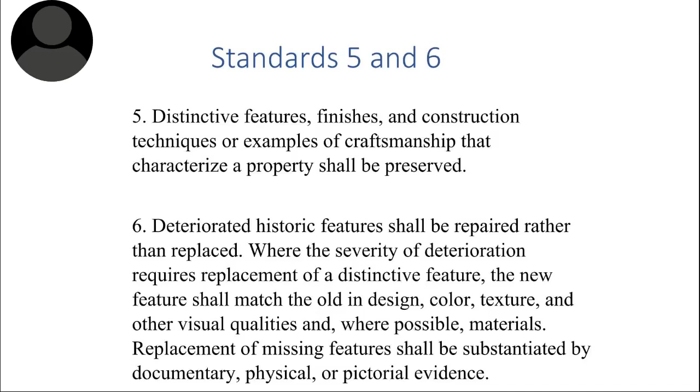Standard 5 and Standard 6 both talk about character-defining features that must be preserved and repaired rather than replaced. Windows are character-defining features on almost all historic buildings, and every effort should be made to keep them.

There are several reasons an owner might give for wanting to replace their windows. The most common are thermal performance, lead paint, ease of operation, and minimizing maintenance.

Hi, Roberta. I just wanted to interrupt for a sec to say that you need to get your camera on so people can see you. Oh, my camera. There it is. Okay. Perfect. Thank you.

Thermal performance can be achieved by keeping the original sash and by adding weather stripping, filling air pockets with insulation, and adding a storm window. A triple track storm window will protect the sash from the elements, therefore cutting down on maintenance.

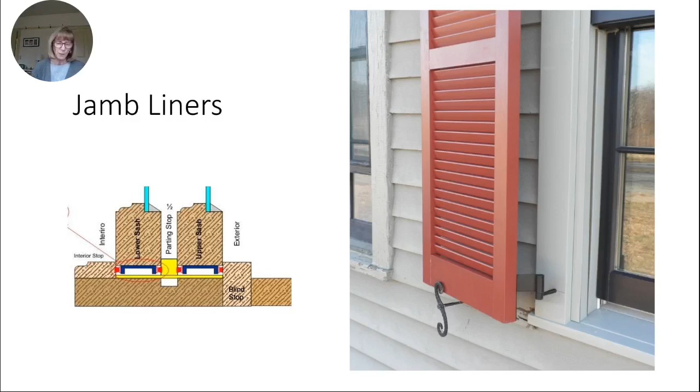So what do you consider when you're looking for replacement windows? First, you want to preserve as much of the historic material as possible, including casings, jambs, sills, plaster, and clapboard that surround the windows. Secondly, you want to preserve the historic design and appearance, so the new window should look exactly like the window you're replacing.

So let's talk about products available in the replacement window market and the pros and cons of each. When conditions warrant the replacement of a historic window, there are two ways to replace windows: you can replace the sash and frame.

This may not be the best option. Installing new frames in existing openings tends to reduce the size of the sash, making a replacement in kind difficult.

These are two ways to install a replacement sash and frame. The first one, you would remove the entire frame that's there. When you do that, you also have to remove the sills and casing, and install new frames in place of those. The removed frames, casings, and sills, which are original historic fabric, are lost unnecessarily.

In most cases they have not suffered the same deterioration as the sash. By retaining the original frames, casings, and sills, the material waste that would end up in dumpsters and landfills is reduced, and the risk of damaging other surrounding historic fabric like plaster, clapboards, and decorative moldings is reduced.

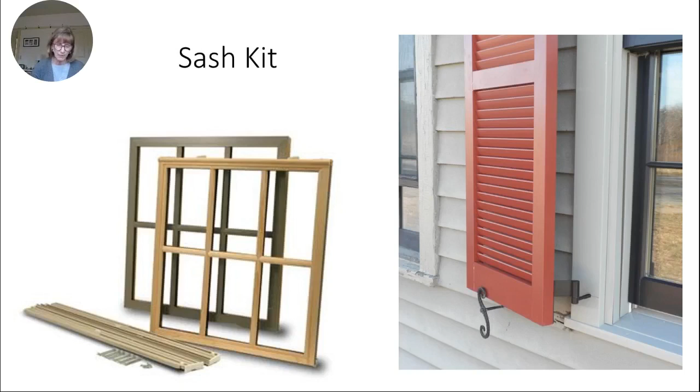There is another kind of jamb liner, called a tilt-pac sash kit. As the name suggests, this type of jamb liner allows the sash to tilt in for easy cleaning. In order to do this, the jamb liner sticks into the opening and is visible when the window is closed, as you can see here in this illustration.

Not only will you see the jamb liner, but the sash must be made smaller to allow for the added depth of the jamb liner. This loss generally comes out of the pane size, which again makes it impossible for it to be a replacement in kind. To meet the standards and preserve historic fabric, and to have a window that looks most like a historic window, a sash kit with a concealed jamb liner is the best option.

So you can get sash replacement in a single glazed, double glazed, or thermopane, or even a triple glazed window.

These come in a true divided light, which you can see here in this picture. A true divided light window has separate panes of glass separated from each other by muntins. The historic windows are an example of a true divided light.

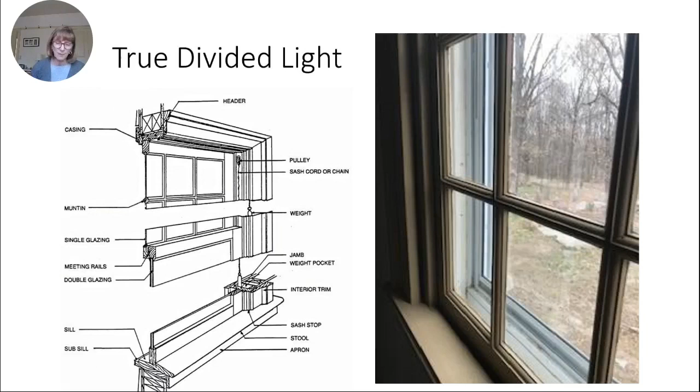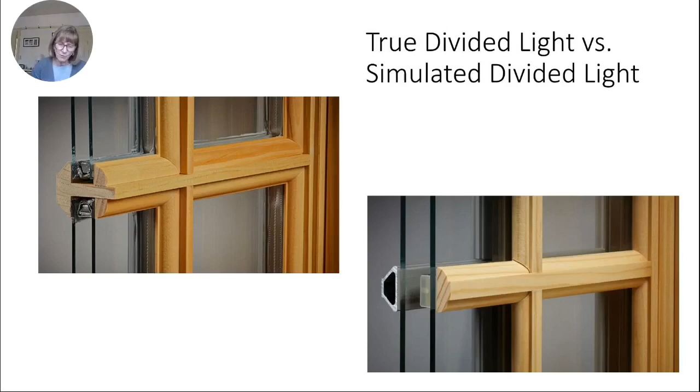The advantage of a true divided light, besides the appearance, is that if a pane breaks, you just need to fix that pane of glass or the muntin surrounding it in this case. But it's a small repair, as opposed to when you break a simulated divided light window, like the window on the right there, where the whole sash needs to be replaced, because trying to repair that sash is very expensive.

You have to take the muntins off, take the glass out, put the gas back in between the panes of glass, and put the muntins back on. So instead of doing that, you would have to actually get a new sash.

There is another kind of grid system called a sandwich grid. This is when the grid is placed between panes of glass, with no exterior or interior muntin. These should never be considered a match for a historic window, because the muntins are hard to see in most lights, and there are no shadow lines that give you the depth of a historic window.

There are lots of materials that replacement windows are made from: wood, vinyl clad, aluminum clad, fiberglass and fiberglass clad, and probably others as well.

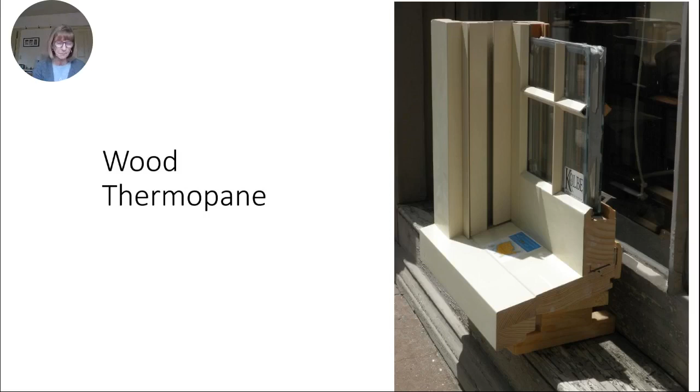Vinyl, although it is the least expensive option, is not a good alternative. Vinyl is not a structural material, and because of that, the windows are generally beefier in order to make them strong. The result is a sash with heavier parts and less glass. Because of that, it is difficult to achieve a replacement in kind.

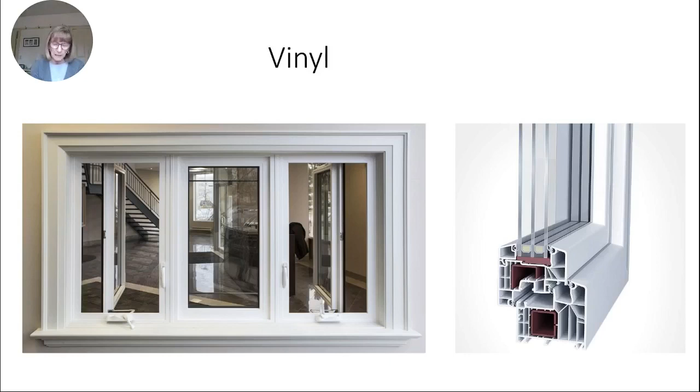Besides not being aesthetically pleasing, vinyl is plastic and therefore not environmentally friendly. It does not react well to temperature changes, which causes warping and melting. It cannot be painted, and vinyl fades and cracks over time.

Vinyl clad is a better alternative, which is a wood window with a vinyl cladding or wrap, like you see here in this illustration. It's a better choice than vinyl, but it does have some of the same issues. Vinyl in general does not react well to temperature changes, cannot be painted, and may fade and crack over time unless the window is white.

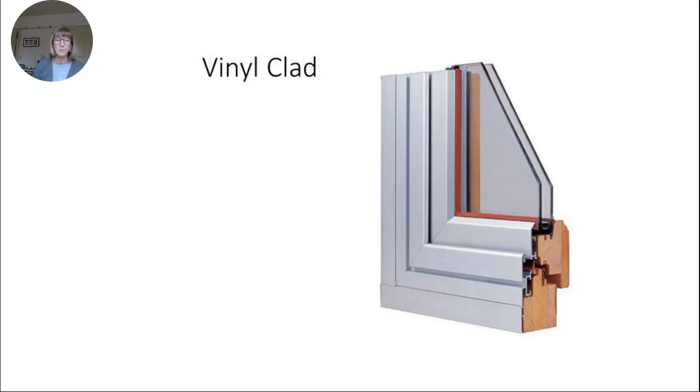Aluminum clad, again, is a better choice than vinyl because it is structural and recyclable. Although wood is always the best choice, an aluminum clad or aluminum sash can be made to look like an original sash more easily than vinyl. Aluminum is easily manipulated, so it can be formed to match historic profiles, and although it usually comes with a factory finish, it can be painted. Unfortunately, aluminum and aluminum-clad windows are the most expensive windows on the market.

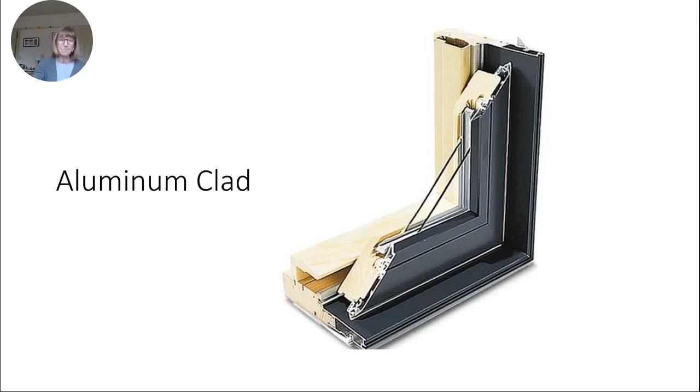Fiberglass is becoming a better alternative than any of these for many reasons. It can be painted and it is structural. Fiberglass can be formed as a solid, and because it can be formed, it can look exactly like a historic sash. It can also be a fiberglass cladding, like you see in this illustration.

Fiberglass is not bothered by water, and because it's inert to moisture, there's no concern about rot, corrosion, mold, shrinking or swelling. It is temperature stable - neither heat nor cold will induce fiberglass to flex, sag, or change dimension. That reduces the chance of leaks around the perimeter.

The stiffness and strength of fiberglass windows means that the windows can be narrower and less bulky without compromising their ability to resist high winds. They can therefore replicate a historic sash more easily.

The cost is also a plus. Although fiberglass windows are more expensive than vinyl, they are half the cost of aluminum, and they are environmentally friendly and can be recycled.

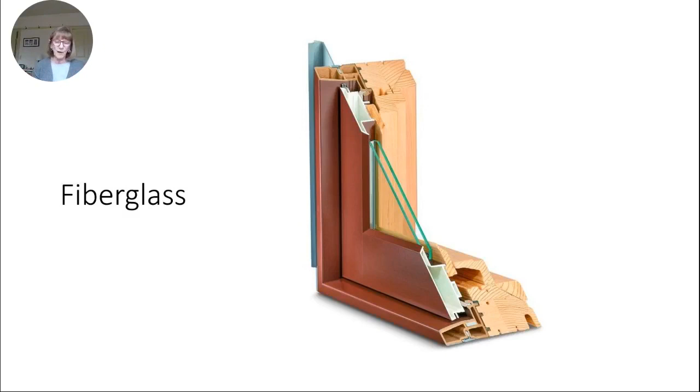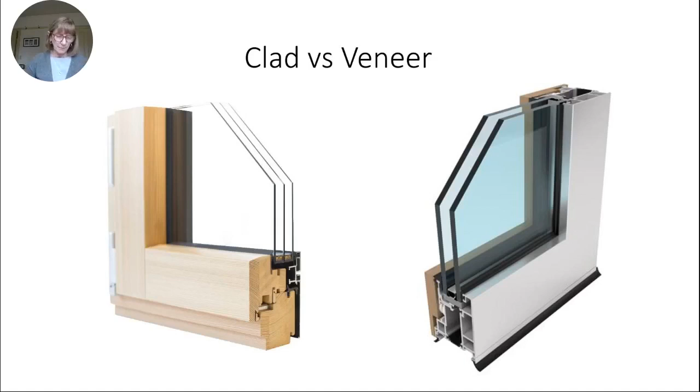I think you're all familiar with clad windows, which I've talked about a lot in this portion of the talk. A clad window is basically a wood window with a vinyl, fiberglass, or aluminum wrap around the exterior, similar to the window you see on the left-hand side here. There are windows on the market that claim to be clad, but are usually vinyl or sometimes aluminum windows with a wood veneer on the inside, which is the window you see on the right.

These windows are generally less expensive and not well made. Because of the way they are made, it is difficult for them to replicate the slender profiles of a historic window.

The window frame consists of parts that we have already talked about. What is most important for our discussion now, since we have discussed that a sash replacement is, in most cases, the best option, is sash parts.

All of these parts have a design and a dimension. These are the features to look at when determining if a replacement in kind is actually a replacement.

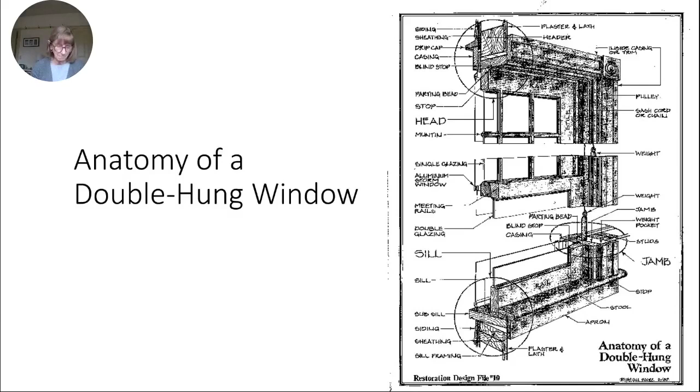The one difference here is the meeting rail. And I will tell you that all window manufacturers say they cannot make a meeting rail that is as slender as a historic meeting rail. It's just the nature of how they make windows now. And for some reason, they say that's impossible to do. So we're always getting windows with a slightly heftier meeting rail.

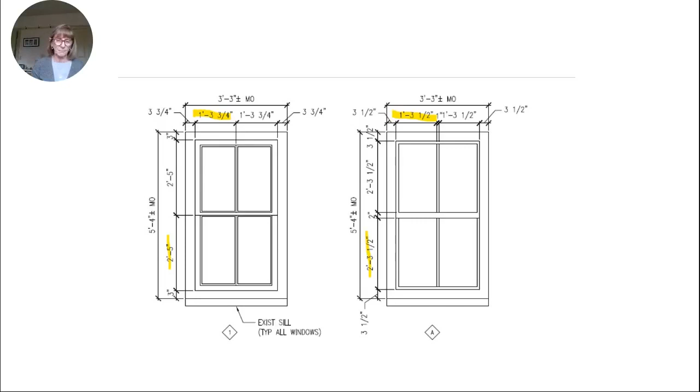Just a note, since most windows we're looking at are double hung, it is good to know that manufacturers offer double hung replacements as well as what is called a single hung replacement. Single hung replacement should not be considered because they have an added piece at the stile that continues down in front of the lower sash and cuts off the meeting rail. It blocks your view of the lower sash completely.

Now let's look at the individual parts. Are the dimensions of the parts the same as the design and dimensions of the historic sash? We'll start with the glass, because in general you want to pay close attention to keeping the glass size dimensions the way that matches the historic window.

So if the glass height and width is the same as the historic window, then you are more likely to get a window with stiles and rails that are similar in dimension as well. When the glass size gets reduced and the pane size gets narrower or shorter, the proportion of height to width changes and the appearance of the overall window changes.

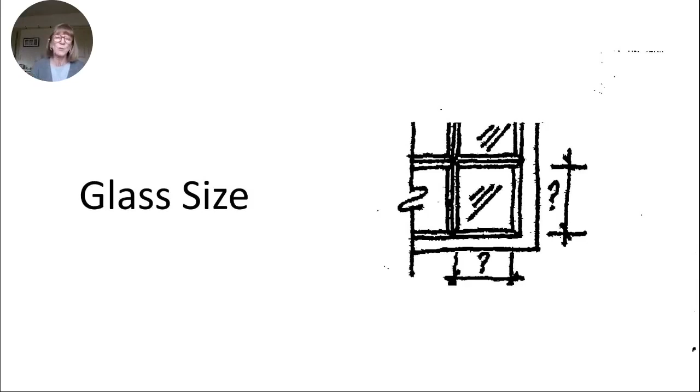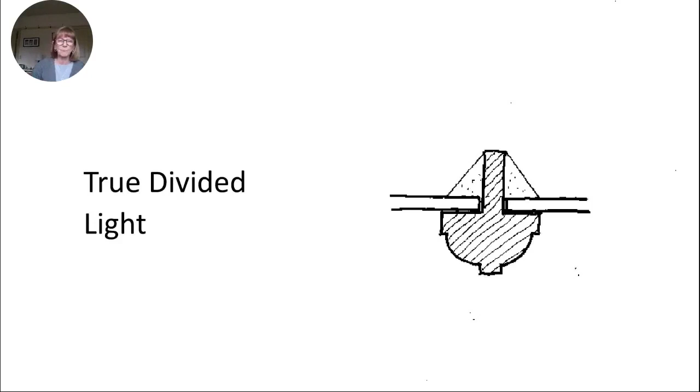Next, look at the muntin. This is a true divided light, as we've talked about before, where there is a wood muntin, in this case, with glass, and then a putty bevel that creates a trapezoidal shape. All historic windows pretty much look like this. So when you're comparing the muntins on a historic window to a new window, you want to make sure that the new window has this trapezoidal shape to the muntin on the outside.

And muntins are generally aluminum or plastic in a new window. So in which case, the dimension should be easy to replicate. It shouldn't be difficult.

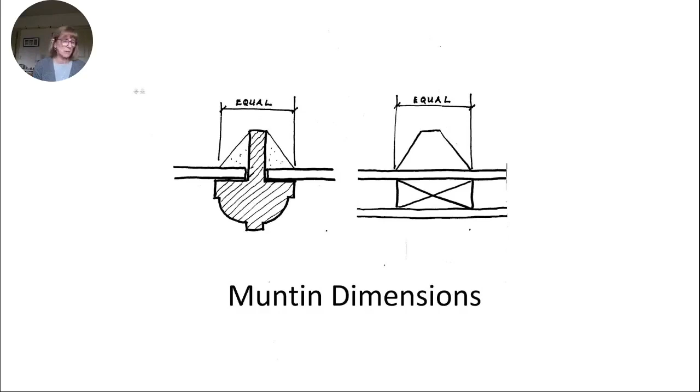The muntin width and muntin depth should be the same as the original window. In a simulated divided light grid, it's important to have the sandwich grid between the panes of glass, so that spacer bar sits between the two pieces of glass. This gives a more accurate illusion of a true divided light sash when viewed from the outside.

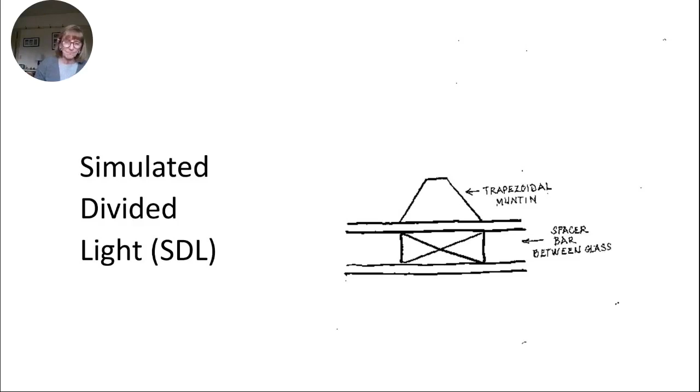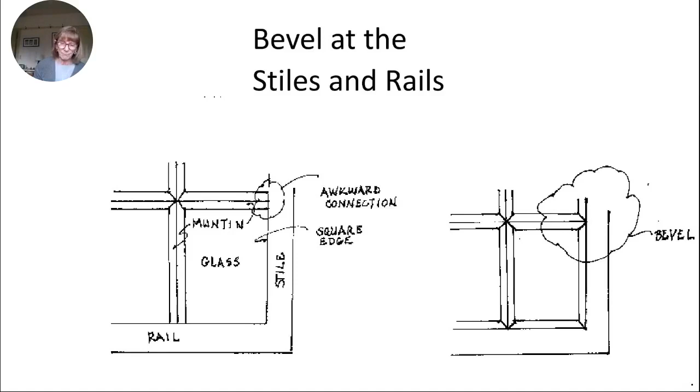Lastly, when looking at window construction, the joint where the stile meets the rail should be a butt joint. Whether the window is all wood or clad, the joint line where the stile and rail intersect should be vertical, not diagonal.

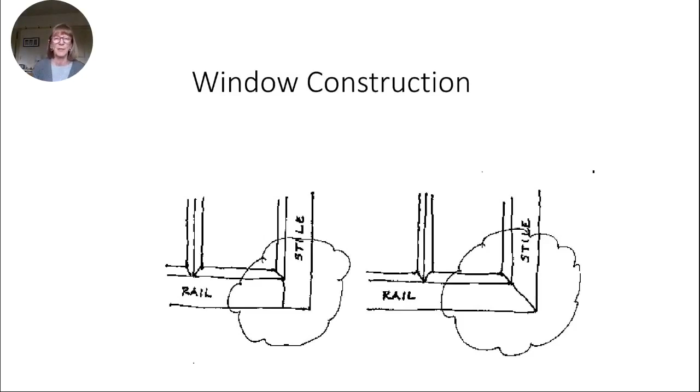I hope I've provided enough information about replacement windows to reach our goal, which is to have the replacement window chosen look just like the beautiful historic windows they are replacing. Thank you. I'll turn this over to Virginia now, who will talk to you about composite materials.

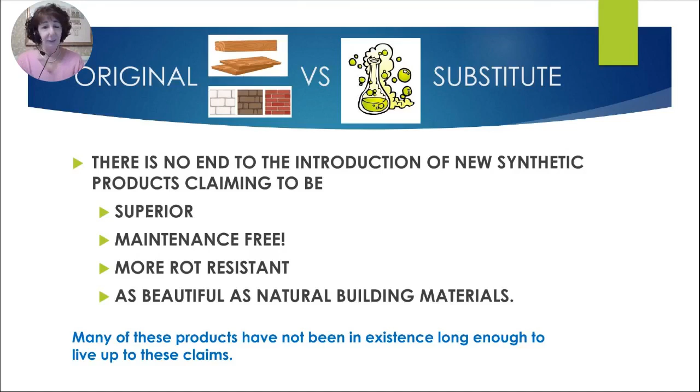Most substitute materials and composite materials are made in a lab. There's no end to the introduction of new synthetic products claiming to be superior, maintenance-free, more rot-resistant, as beautiful as the natural building material. But in fact, none of these have been around long enough to really substantiate those claims. So we have to evaluate the material both visually and in terms of performance.

Let's look at some evaluation criteria. What is the need for replacing this historic fabric? First of all, it's fair to ask a property owner why they think they need to replace it, and who's advising them on replacing it with this new material. If it's a contractor, it could be trying to sell a product. But there are deteriorated features of historic buildings that legitimately need to be repaired.

So has the product performed poorly? Is the original material no longer available? Are the craftspeople or tradesmen not available to replicate the work? Or do current codes not permit use of original material? That might be something like asbestos-containing products or lead-coated products.

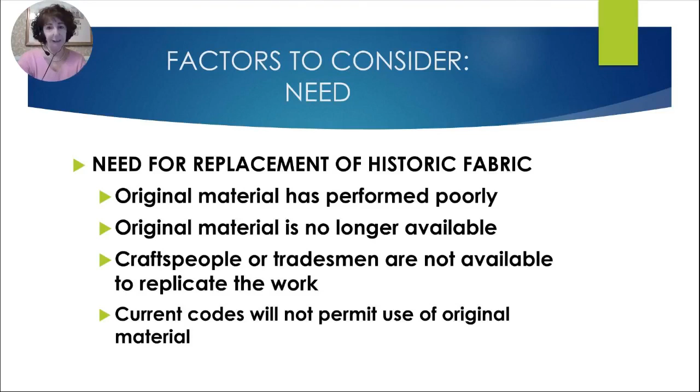You should also evaluate the quantity and location of the material that they're proposing to replace. Is it on a character-defining facade? Is it a character-defining feature? Is it high up on the building, on a multi-story building where it's harder to see but also harder to maintain? Or is it in close contact with the ground where moisture is an issue? Or is it in the back of the building where no one will ever see it?

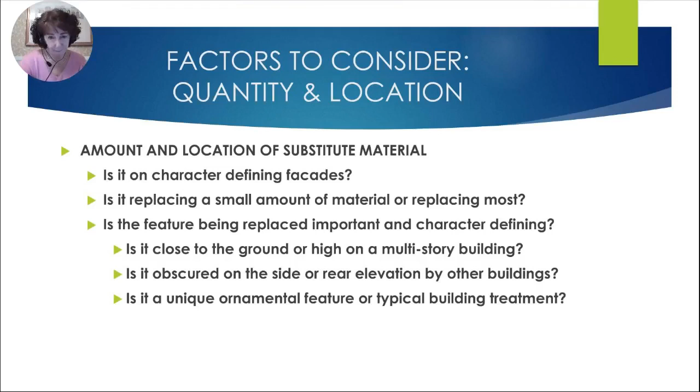Visual qualities: really, how close a match does it appear to be? Look at the design, the color, especially variations in color and aggregate across the material, the dimension, surface and thickness, surface texture, profile, reflectivity, and finish.

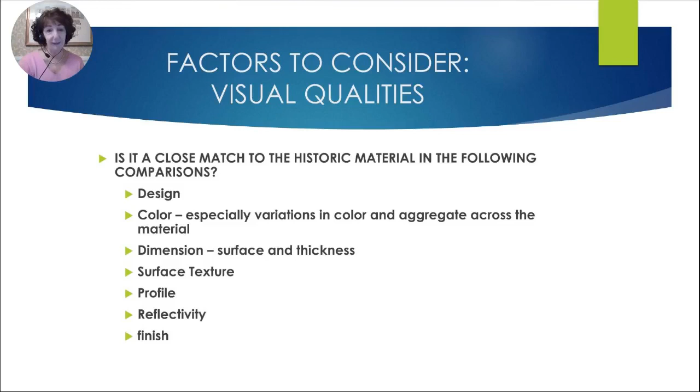Finally, consider the performance of the material. Has it been around long enough to prove that it will weather well over time? What about the density and texture, the rate of thermal expansion and contraction, rate of vapor permeability? How will it age and wear? Color retention, will it fade? That's a big problem with many of these products. And the strength, is the new product as strong as wood? We saw in windows where vinyl cannot reproduce a wood member because it's not strong enough.

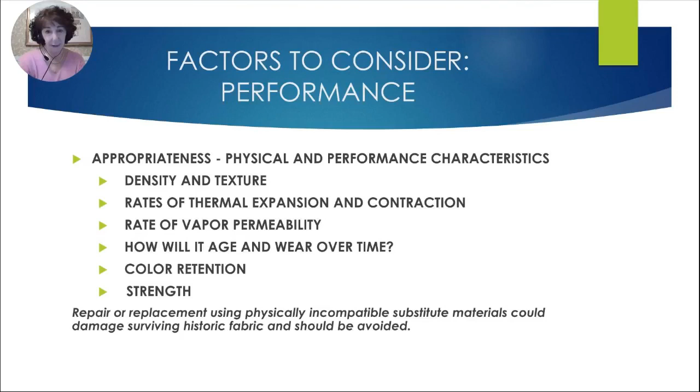Some of the materials we're often asked to substitute: PVC, for example Trex, is a product you've all heard of for wood decking; cast stone for natural stone; vinyl and plastic or PVC, such as Azek, for wood and metal replacement; rubber and PVC for slate roofing; fiberglass or FRP for stone, wood, metal, ornament and trim replacement; EIFS, or Dryvit as you may know it, for natural stucco replacement; and cement board siding for wood siding.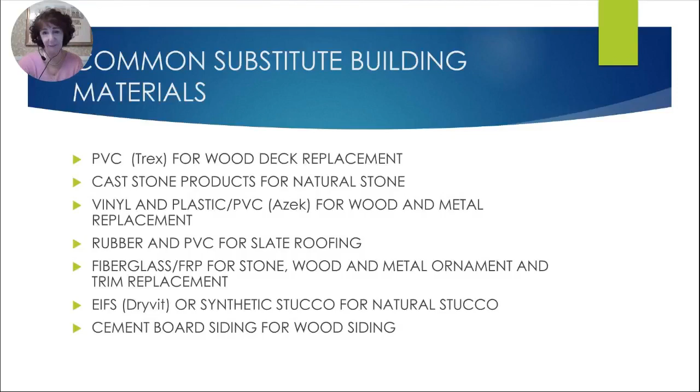We'll look at some of these, not all of them. In my personal opinion, there are very few substitute materials that are a close visual match for natural materials and which also behave in the same way in terms of expansion and contraction, weathering, strength, and color retention.

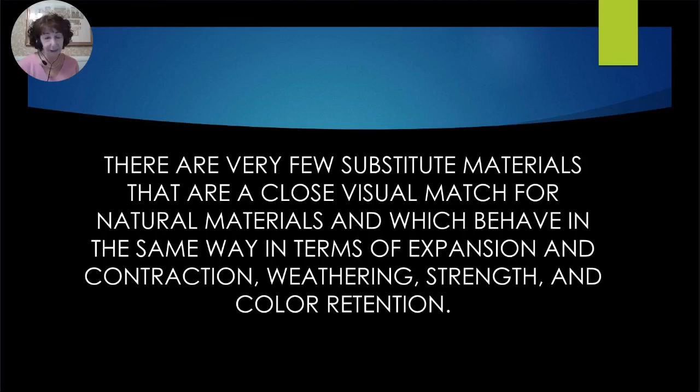So let's evaluate PVC trim, since that seems to be the most popular thing to use these days. Flat board PVC trim can match the appearance of painted flat wood trim. It's a low bar, it's easy to match, and it can be done.

Unless it is painted a light color or just plain white, the PVC will absorb heat and expand and contract to a greater degree than wood. It is better used in higher locations, which are more difficult to reach, to paint, repair, and also to see.

And where it also comes in direct contact with the ground, such as skirt boards and plinth blocks, it should always have a smooth finish and never a raised wood grain finish. It is not ideal for replacing historic porch railings unless the original spacing can be replicated.

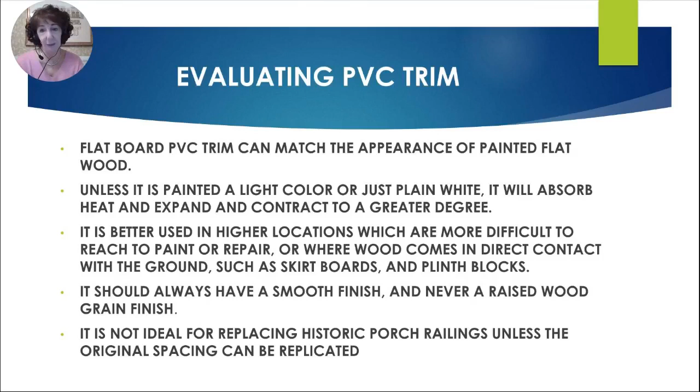And I have an example of why that's the case. But first, this is just an illustration of how long boards of running trim can separate because of the expansion and contraction issue, and gaps often do open up in that kind of situation.

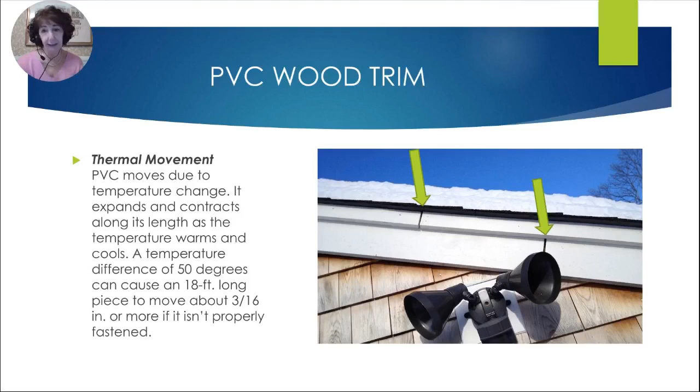And with porch parts, this is a perfect illustration. On the left is a wooden porch railing that was supposed to be replicated by the applicant, the developer. And unbeknownst to us, they chose to do it with vinyl, and not only white vinyl, green vinyl, which compounds the problem of the strength of material, because the darker color absorbs more heat and is a weaker material.

So what they did was they had to reduce the spacing between posts that you see on the left, and they also could not have the long continuous top rail because the material couldn't do that. It would have been floppy. So they had these little posts come up through the top rail so they could have lots of short lengths of railing. And as a result, the new railing looks nothing like the old railing.

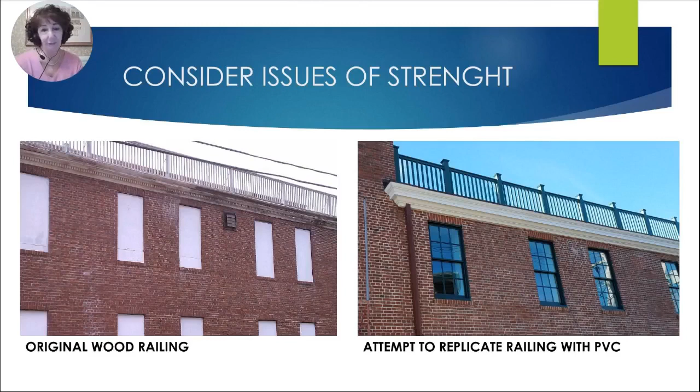So it's because of the nature of the vinyl material that it could not replicate the original porch.

Slate roof shingles were also often asked to be replaced with either rubber or asphalt. But the nature of real slate is it has a variety of color and texture within the natural material. You can see on the left where the color has changed over time, so it's not a uniform color. Not every single slate is quite exactly the same.

There are different edge profiles, but most rubber slate products are limited in sizes. They are also a very uniform color. You can get different colors, but across the product line, it's very uniform. So here's a natural slate next to a rubber slate, and actually they do look sort of similar in texture and edge profile, but the color is just poured into a mold, and it's one flat color.

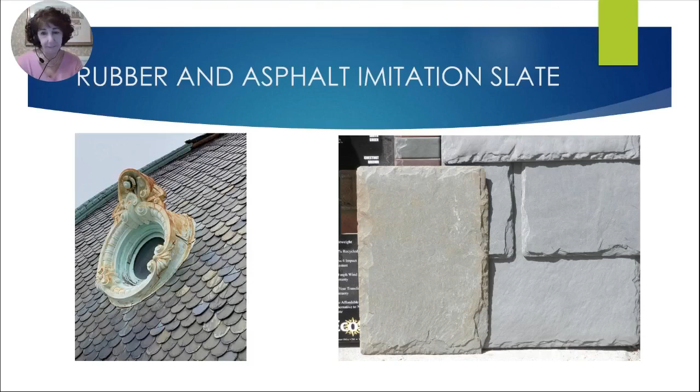In evaluating these new slates, natural slate has a color variation across the shingle and between shingles from one to the next, which will further weather over time. Weathering slate changes color, resulting in a patina of subtle color variations. Rubber slate will not do that. Rubber slates are poured into a mold and are uniform throughout.

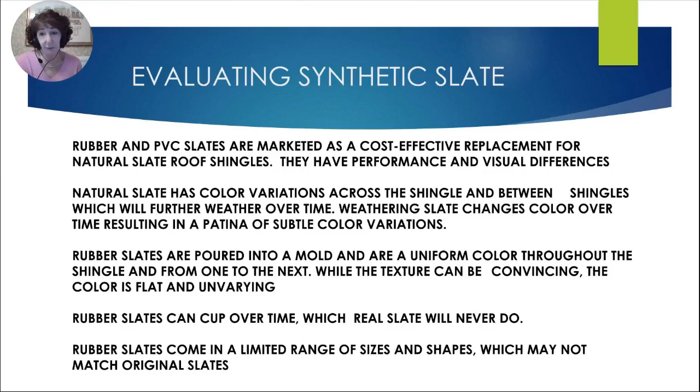And they're also uniform in size. Not all slates are the same size. From roof to roof, they could be very different in size. Some are wide, some are narrow slates. The rubber slates tend to be a very narrow size range, so you might not even be able to match the size. And they tend to cup over time.

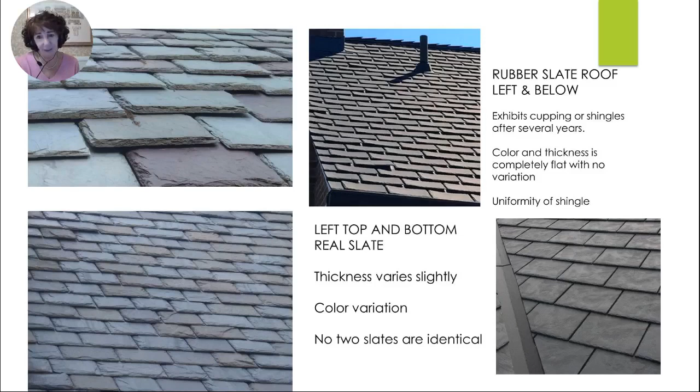Here's some examples that you can see. The two slate roofs on the left have different thickness from slate to slate, both in width and in edge profile, and obviously different colors from slate to slate. The picture in the middle shows a rubber slate roof that has started to cup, but there's a uniformity about it that you don't see in the natural slate roof. And the same with the picture in the lower right corner, extremely uniform, no variation in thickness or color.

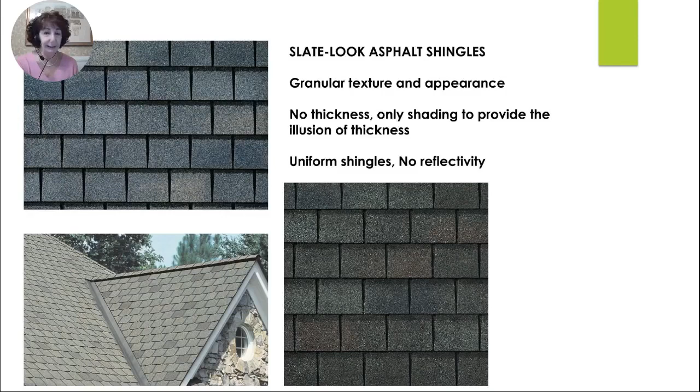And then there's the asphalt slate, which has no thickness whatsoever, but they try to achieve that effect with the shadow line between and below each shingle. But again, they're all very uniform in size. They have a granular texture, which gives them their color, but that doesn't match a slate, which has a smooth finish and a sheen to it, and there's no graininess to it. And these granules will actually weather off over time, so who knows what it will end up looking like. But the result is that it doesn't really replicate a slate roof.

Cement board siding. There are appropriate applications for cement board siding, but there are also physical limitations that result in a very basic change that you should be aware of.

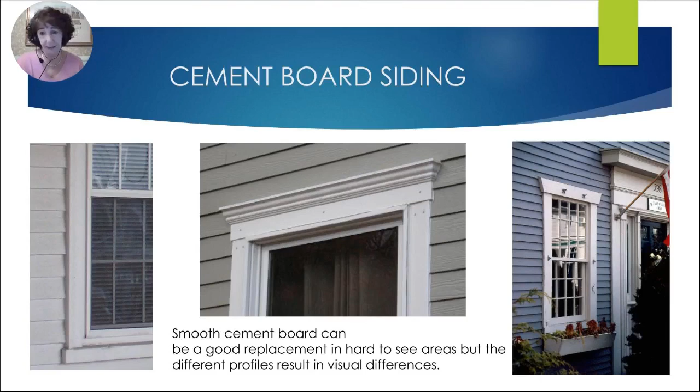In the two pictures of the windows on the left and the right are historic windows with an appropriate relationship of lapped siding to trim, which has the window trim standing proud, and you can actually see the edge of the window frame sticking out. But the cement board siding is overall a thicker application, so it comes out flush with the face of the trim, and it flattens out the facade in the big picture.

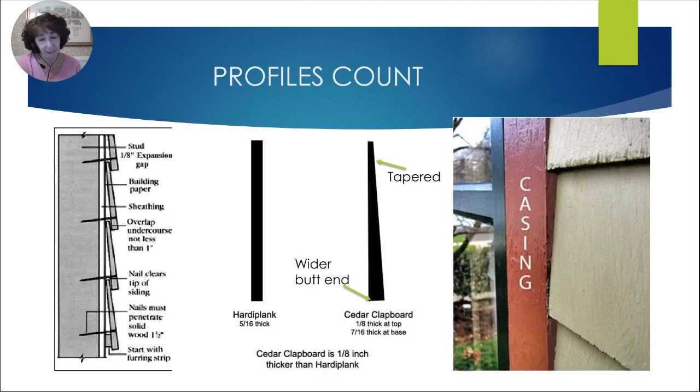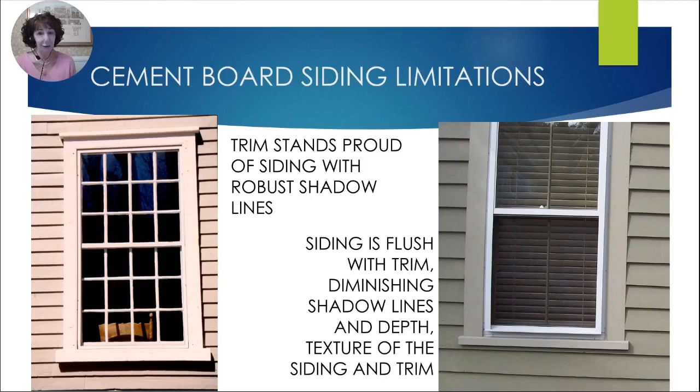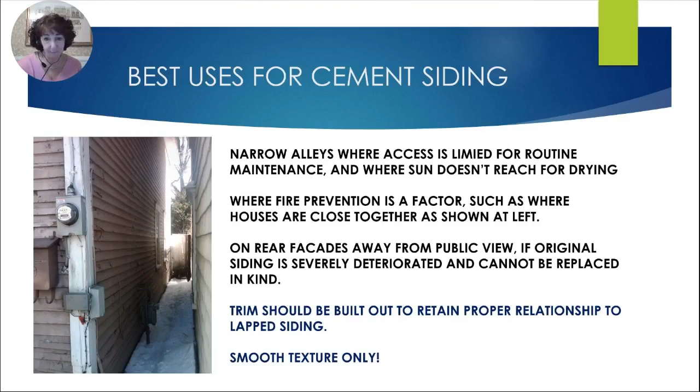So where is it appropriate to use it? Narrow alleyways where access is limited for routine maintenance and where the sun doesn't reach for drying it out, where there could be a potential for mold. Also where fire prevention is a factor, such as where houses are this close together in this alleyway. It is more fire resistant than wood, obviously. On rear facades away from public view, if there's a deterioration problem with the original siding and for whatever reason it can't be replaced in kind with wood. But where it's used, the trim ideally would be built out to retain the proper relationship of the lap siding to the window trim. And remember, smooth texture only, please.

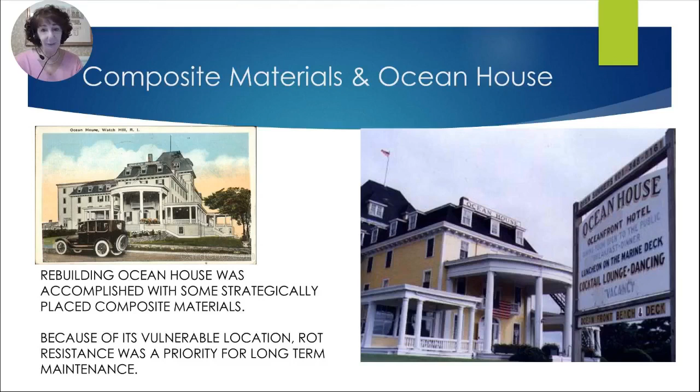This is just a case study of where some composite materials were used to replicate historic features. You're all familiar with the Ocean House and how it was reconstructed, and our office was involved. We had a memorandum of agreement with the developer to help them rebuild the building so that it looked as close as possible to the original building.

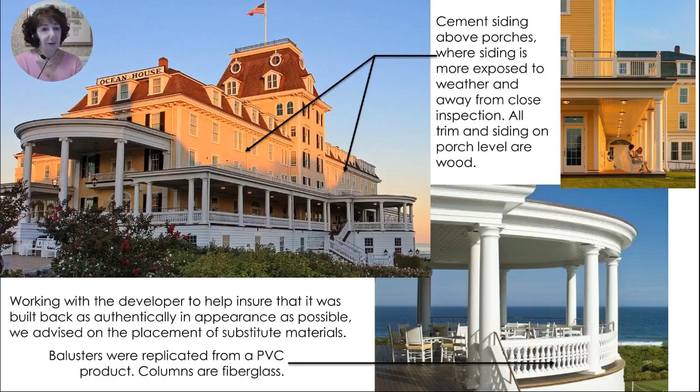So some of the compromises had to do with cement board siding. They used the cement board siding. Their insurance company wanted them to use it because of the fireproof quality of the material. So the compromise was that they used it above the porches, further away from public view, and under the porches where people walked close to the building, they used wood siding, wood trim, and everything was authentic.

The other place that they used composite materials were on the porch parts. They replicated the balusters in synthetic material. They were able to turn them and replicate them exactly, even to the original historic height. And they met code by just adding the simple metal railing on top, which you can barely see. And the columns were fiberglass, because that building is exposed to such harsh weather that they really needed something that was going to stand up to that over time.

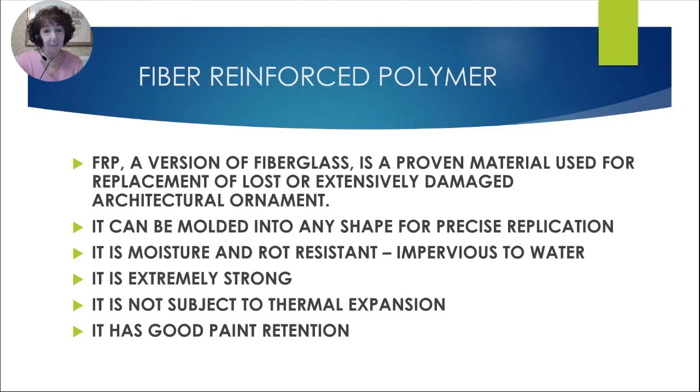And then the last material I'll talk about is fiber reinforced polymer, or FRP. It's a version of fiberglass and is a proven material used for replacement of lost or extensively damaged architectural ornaments. It could be molded into any shape for precise replication. It is moisture and rot resistant and impervious to water. It is extremely strong, not subject to thermal expansion, and has good paint retention.

Sounds good, doesn't it? I want to show you an example of where it was used, and it's holding up really well. The old Providence Journal building on Westminster Street downtown was restored in the mid-1980s, and a lot of the original ornament had been damaged or destroyed, so they were able to replicate it with fiberglass. A recent examination of the building within the last two years showed that the fiberglass is still in really good shape. That was great to hear.

But it is not the perfect material. It is good for replacing architectural ornaments such as medallions, finials, friezes, brackets, and cornice moldings, replacing wood or metal if it's a particularly ornate cornice, because it's a much less expensive material than wood. Also storefront columns, if it has to replace missing cast iron columns, and porch components such as columns, newels, and balusters, because it's a much stronger material than vinyl.

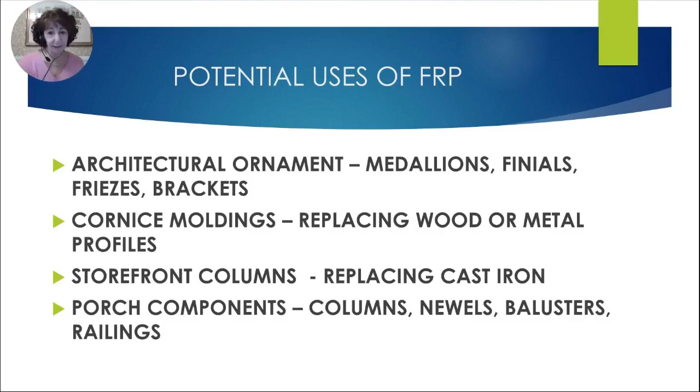But this is an example where it was used with mixed results. The Cranston Street Armory has a balcony way up on top of that tower that had to be removed because it was falling off. Fortunately, it was saved and replicated in FRP, as you see in the picture in the middle. It actually came out pretty well and held up pretty well structurally, and it was a lighter material than the masonry.

But the problem was, you can only pour it into a mold in one color, and the rest had to be hand painted to replicate the brick and other features. That paint faded very quickly, and that was the result—the faded balcony. So it was removed, and they rebuilt the original and put it up with extra support. And that is the story of the FRP.

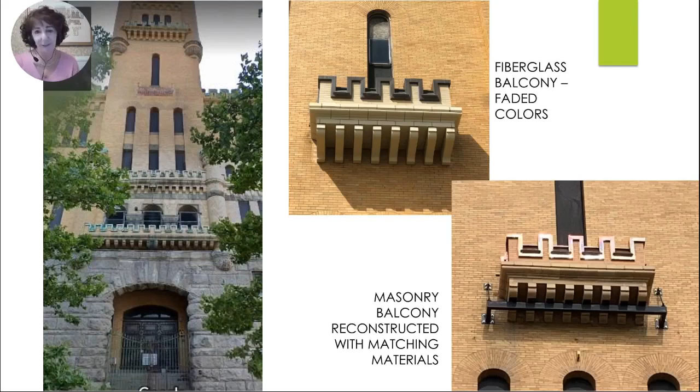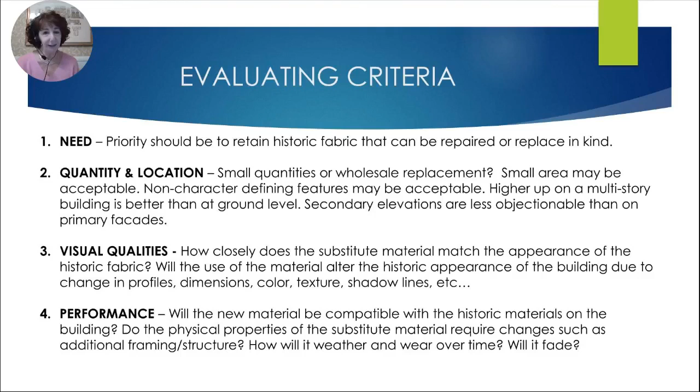So just to quickly wrap up: please never, never, never use raised grain. It's a sandblast effect, and wood does not look like that naturally, whatever they tell you. The evaluating criteria you should consider: the need for replacement—always, always, always repair or replace in kind before considering alternatives—quantity and location, visual qualities, and performance. And I've talked long enough.